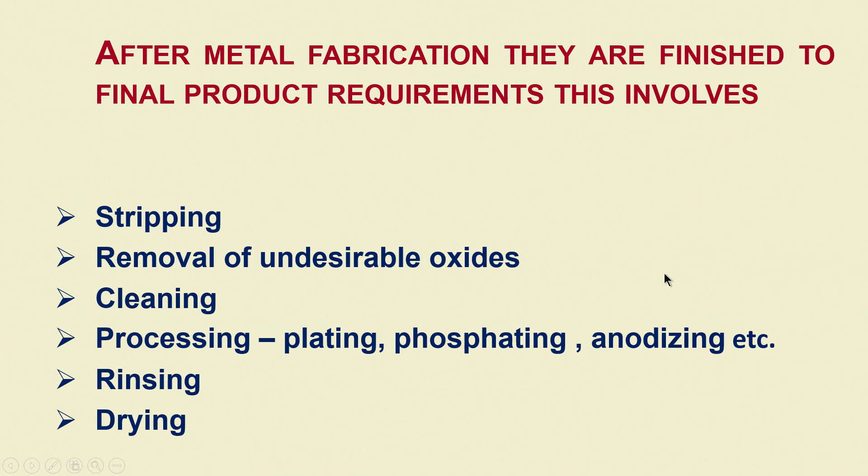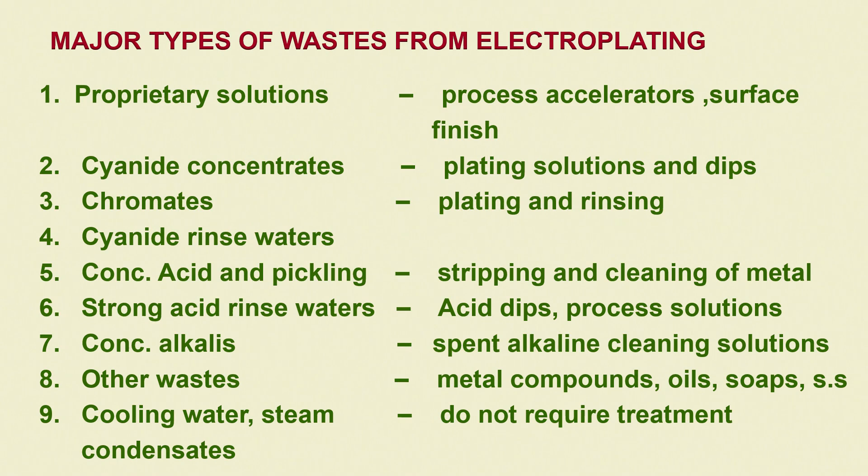These are the metal finishing industries and their final products, typical operations, and waste origination. This is regarding the major types of wastes in electroplating industries. Other industry wastes also will be almost similar.

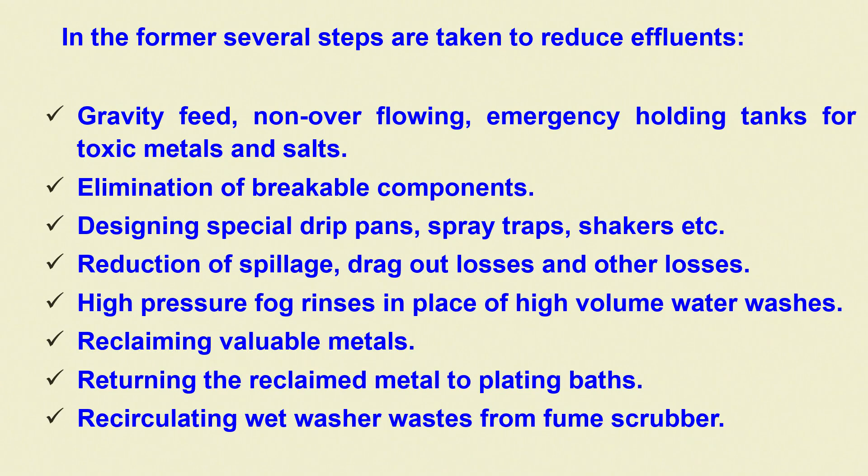Then these are the salts, cyanides, etc., followed by treatment corresponding to different types, and specific steps we had discussed earlier.

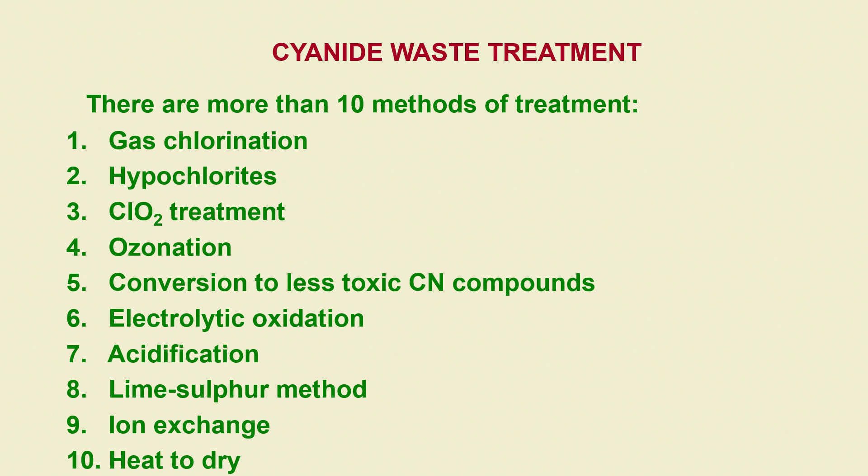Cyanide waste treatment has a number of possibilities. We need not be afraid of cyanide in the effluent, and chlorination etc., these I have discussed in detail.

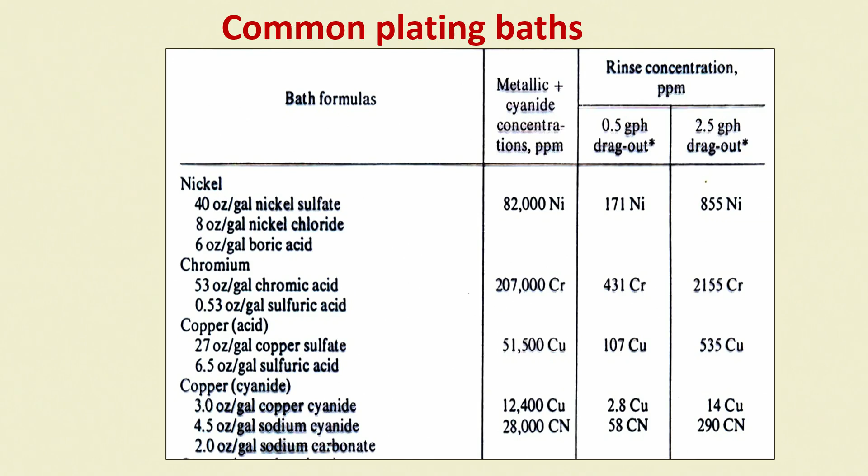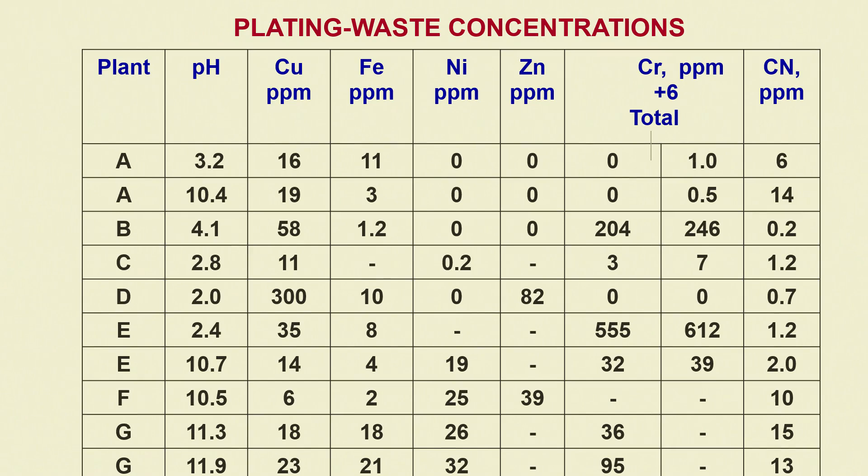And then sludge, electrochlorination etc., where there is no sludge. Then typical common plating baths and bath formulas we have discussed, followed by flow charts for some common plating baths, then plating waste from different kinds of industries.

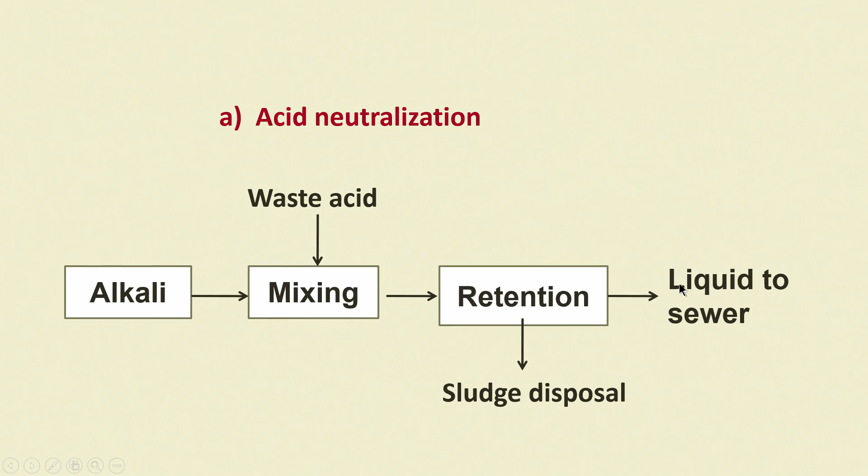Then basic treatment, all these we have discussed earlier. So I am just reminding you quickly what steps are involved before we proceed on to the ZLD, such as batch acid neutralization, all of which we have already covered.

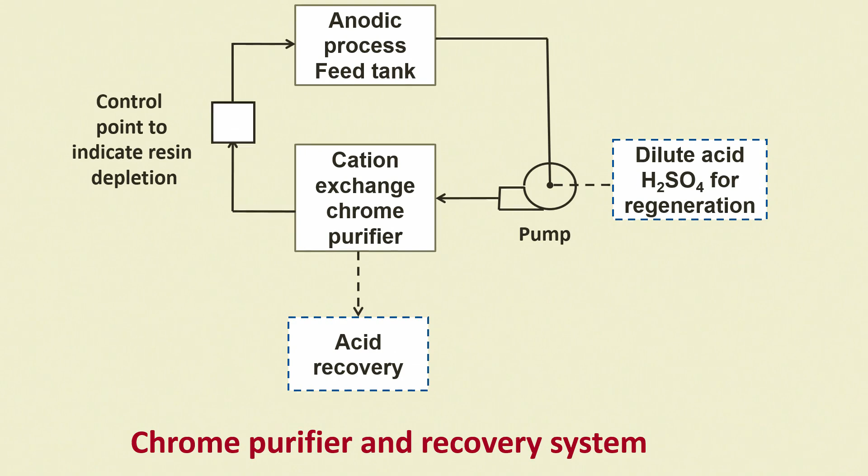Chrome recovery systems, vacuum evaporation, reduction, precipitation, followed by neutralization, and then I had discussed with you about the solubility products of the hydroxides of many of these metals -- copper, zinc, lead, silver, cadmium hydroxides.

Their solubilities are slightly minimum in alkaline conditions, but solubility will increase in acidic conditions below pH 8. If you look at the solubilities of sulfides, there is also a possibility that we can collect them at the order of about 10⁻⁴, that is ppb levels. Precipitation is possible.

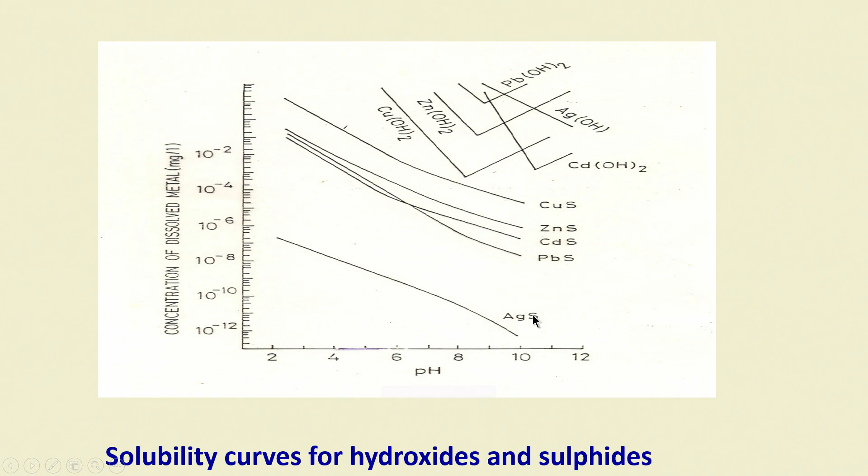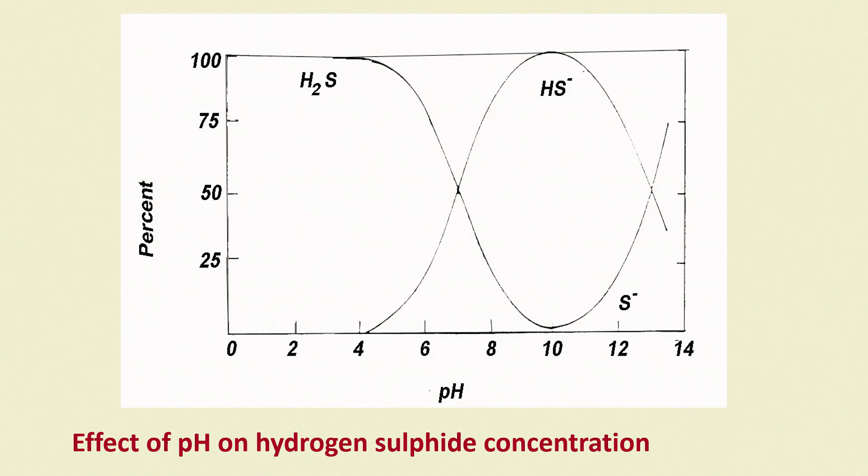So these are typical reactions I had shown, and two types of complexes with sulfide precipitation, their pH effect, and then a typical procedure for treatment, including various processes and wastes requirements -- this we have discussed.

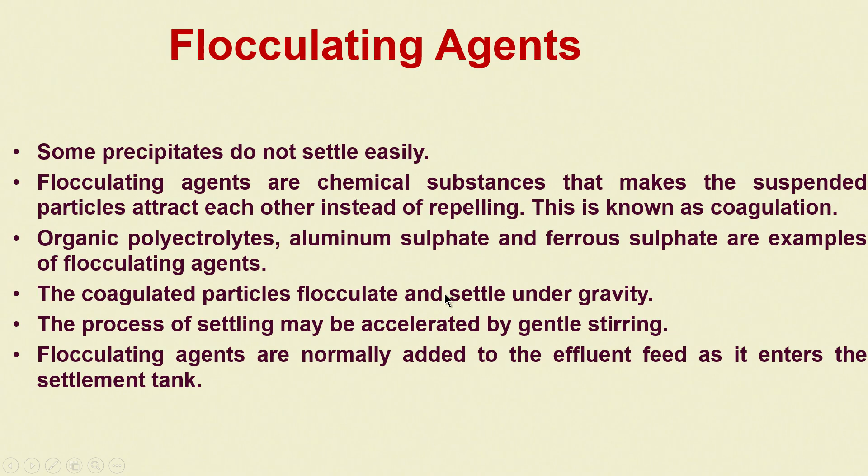Then some flocculating agents needed for collection and precipitation of some of the sludges, and sludge treatment I had discussed a little bit, sludge disposal followed by sludge containment, etc. That brings us to the last discussion part: zero liquid discharge.

What do we have here? I will give you a small outline of what is zero liquid discharge, and I would like to tell you at this point that zero liquid discharge is a very, very important concept in 21st century living.

The basic thinking is, if the effluents contain toxic substances, then they have to be separated. Then if I separate, would the water be reusable or not? If I am able to separate the pollutants, would the treated effluents be reusable or not? The answer is usually no.

It has to go through at least about 600 feet depth fall and about 20 kilometer flow before it collects enough oxygen from sun's rays and from the atmosphere, and enough radiation from sun's rays, to get natural purification, and that too subject to proper dilution.

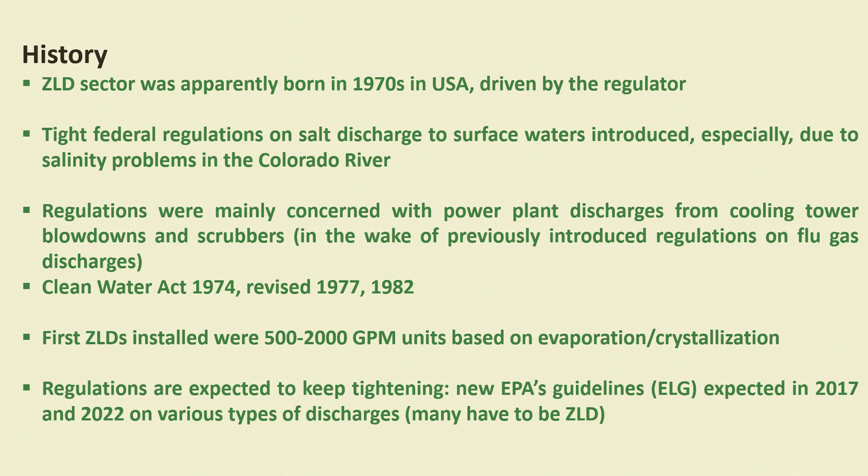So what are the current drivers? The major driver for using ZLD includes environmental regulations for discharge of specific solutes, salts, toxic elements, nitrates, nitrites, cyanide, chlorides, hydroxides, sulfides, etc.

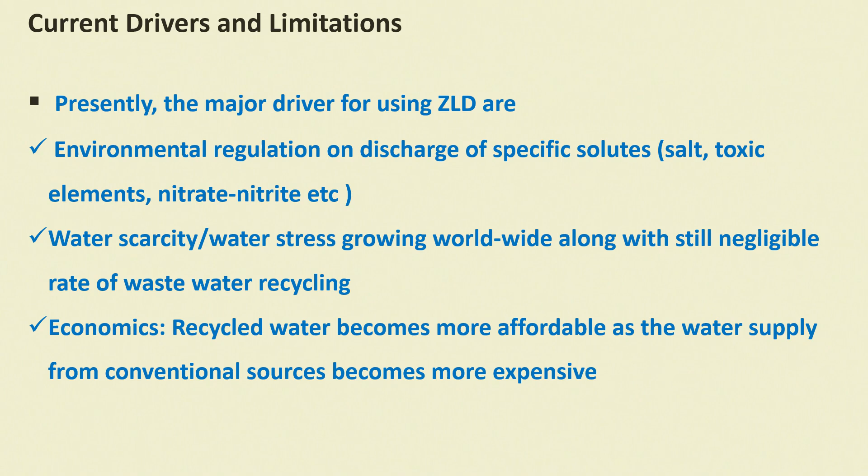Then water scarcity is another driving force, water stress in the growing world. And then economics: recycled water becomes more affordable as the water supply from conventional sources becomes more expensive. This is a very simple economic concept.

Growing responsibility and education towards awareness of environmental issues is also one of the driving forces, followed by ZLD cost, which is high in most cases, potentially becoming a more economic solution when waste needs to be transported in large volumes over long distances.

Here I want to add that if the quantities are really large, then you cannot transport so much liquid elsewhere. But if you go for ZLD, what remains after taking out the liquid is a very small quantity of waste, so that will become much cheaper in handling.

Still, in spite of all these advantages, ZLD has some drawbacks also. As of now, it is very highly costed, that is both capex and opex, capital expenditure and operating expenditure, is very high as of now.

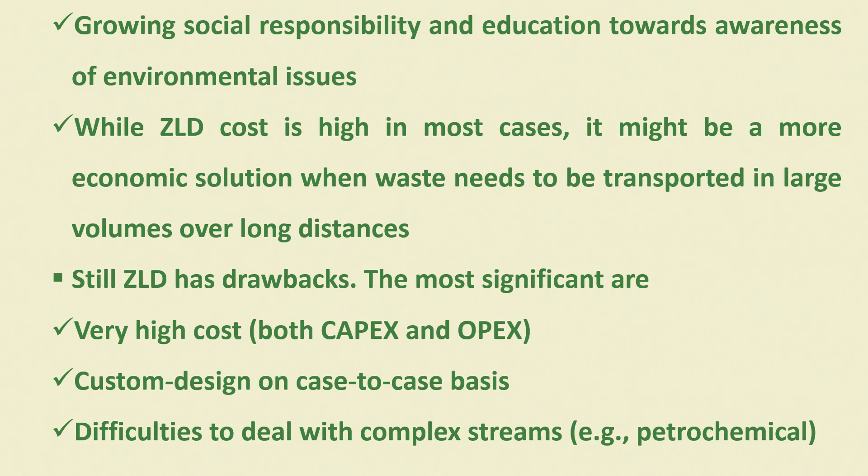A custom design has to be made on a case to case basis instead of a general design, and then there are difficulties to deal with complex streams. For example, petrochemical streams will have a lot of problems, especially since the wastes that are generated would not be common with many of the effluents produced in other industries. They are all special industries where they need special treatment only.

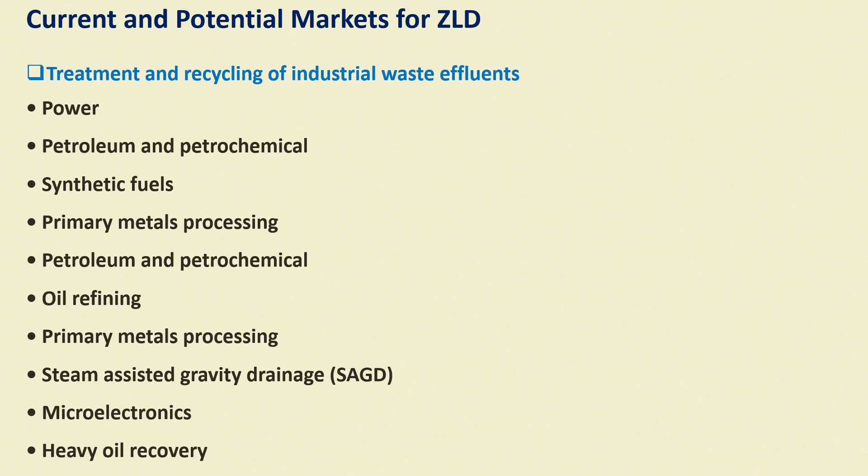Then heavy oil recovery is another aspect where current and potential markets for ZLD are expected to make rapid strides in progress.

So there are other industries, for example cogeneration, pulp and paper, coal mining, fertilizer, solid waste, battery manufacturing, PVC, coal, ethanol production — all these are very important industrial aspects, followed by tertiary treatment of municipal wastewater effluents and inland desalination.

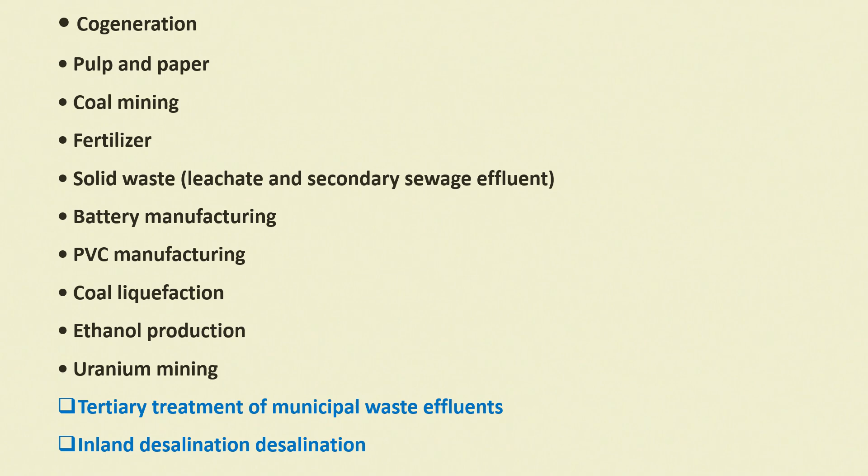So conventional thermal ZLD technology basically is based on evaporation and crystallization operations. Evaporation usually aims around 90% water recovery, whereas crystallization may achieve even 100% recovery.

We do not mean 100% when we say 100%, but at least 99.99% should be feasible. So solids can be further dewatered on a filter press for landfill.

There are a couple of mistakes here. Double typing has taken place. I request you to bear with me. I have tried to correct it as much as possible. But it does not make sense to have that kind of mistakes.

So latent heat of evaporation is partly recovered. Operational and capital costs are still very high as of now in ZLD.

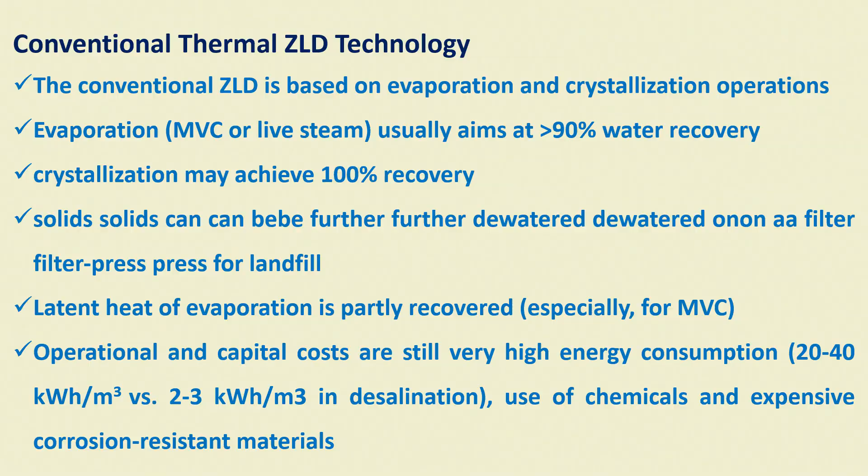For example, in ZLD, you can see that 20 to 40 kilowatt hour per cubic meter energy consumption is there, compared to 2 to 3 kilowatt hour per meter cube for desalination. So, use of chemicals and expensive corrosion-resistant materials is another aspect that is as of now a small hindrance to ZLD objective. See the complex

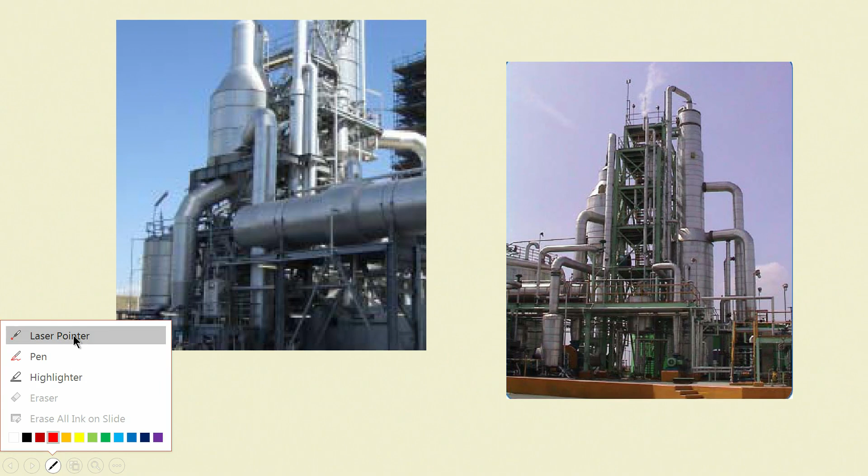ZLD operations, and these are all for petrochemical industries, only effluent treatment systems. So, it makes a lot of complicated engineering design, cost, treatment cost, etc., but you can see that the wastage or effluent in the gaseous form coming out is very less here.

Then there are other techniques, for example, this MVC evaporation technique. So here, suspended solids are removed prior, and the calcium hydroxide and magnesium hydroxide precipitations are commonly employed. And here I have a boiling point, a fraction evaporated, etc.

Some of these things, if you study well, you will be able to know. I know about it, and I am not going into detailed aspects because these are all very simple flow sheets. And anyway, whenever you want to design a ZLD, you will have to do it case by case only. So I am not going into detail. These are the common typically available systems.

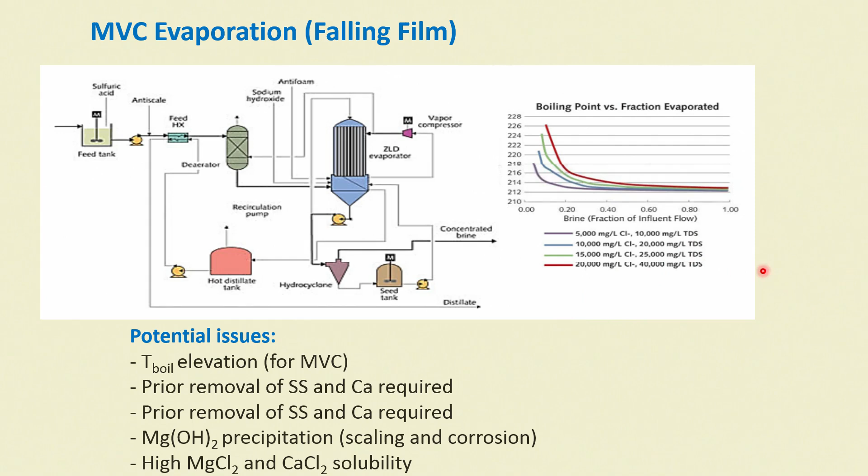So, for example, if you go for crystallization, it is not very tricky. For example, here I have brine and steam is there, condensate is there. We add a little bit of antifoam, sodium hydroxide neutralization, and take it to crystallization, and then after crystallization, filtration and collection and disposal. Similarly, vacuum crystallization is also another system.

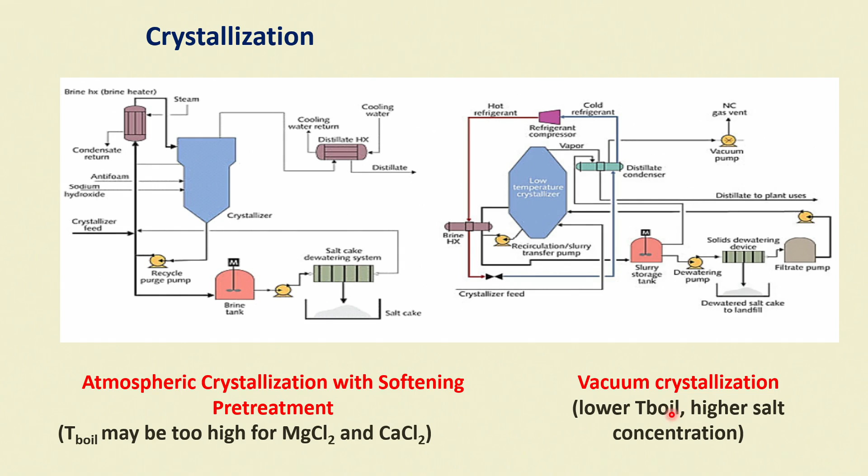Here the temperature for boiling will be reduced quite a lot, followed by higher salt concentration, which is a very typical advantage. Now, hybrid ZLD technologies are there, a little bit mixing of the technologies, but there is strong motivation to employ energy saving processes. For example, this multiple evaporator system, MVC crystallization, etc.

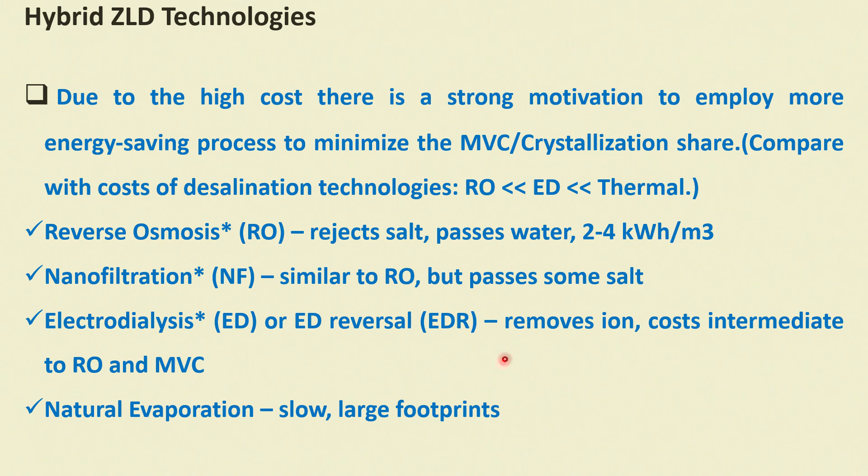Electrodialysis removes ions, costs are intermediate to RO and MVC. Natural evaporation, again, is slow and has large footprints, again not so favored. But any of these - reverse osmosis, nanofiltration, electrolysis, electrodialysis and electrodialysis reversal - all these things are quite often employed in modern day zero liquid discharge systems.

So, another possible motivation is the presence of organics, volatiles, etc., colloids, etc. Here what happens is many of the volatiles will not be economically recoverable if the concentration is very low. So we go for evaporation, and then if we cannot recover, if we cannot let them into the environment as vapors, we can go for bioremediation. Bioremediation and then this membrane units, ultrafiltration, pre-treatment, membrane biological systems.

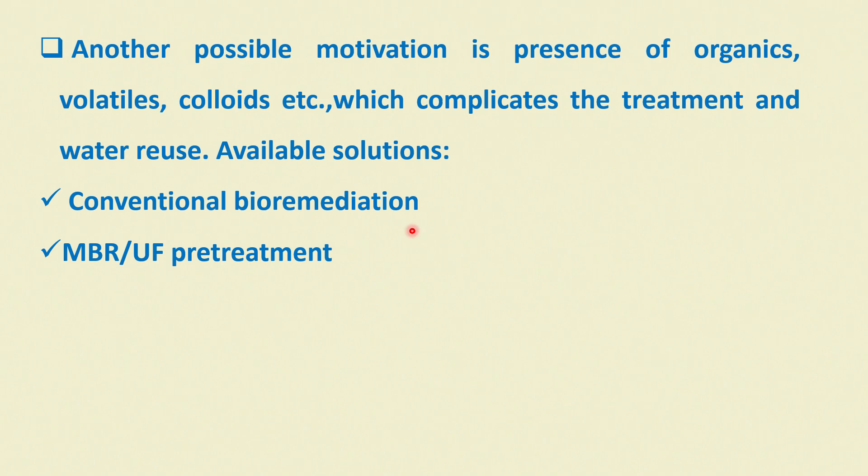These are all very typical technologies which are well established. Then ZLD combined with RO is again a very attractive system. RO is presently the best and most energy saving available technology for desalting. The purpose is then to use RO to recover as much water as possible before MVC.

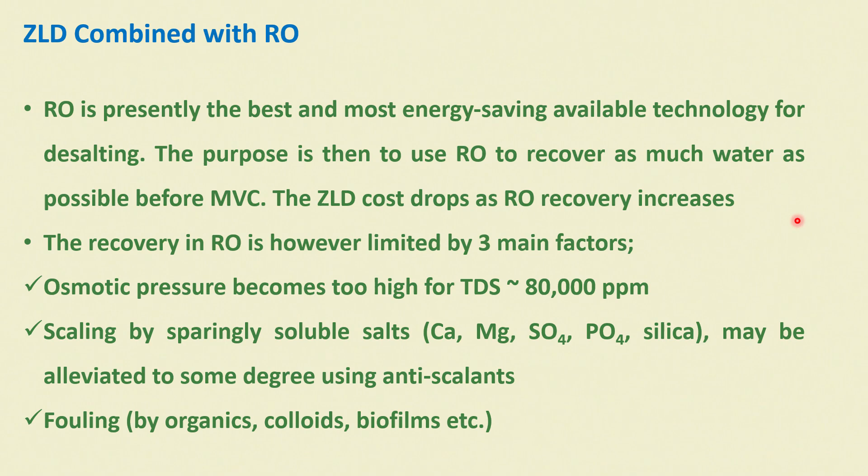If you wish to recover reverse osmosis water, average efficiency is approximately about 50%, but nowadays the recovery varies from 85 to 95%, and the TDS, total dissolved solids, osmotic pressure becomes too high for more than around 80,000 ppm or something. So, scaling may be alleviated to some degree by anti-scalants. And then fouling, of course, is always there. So, if there are organic substances, colloids, biofilms, etc., you cannot employ RO systems.

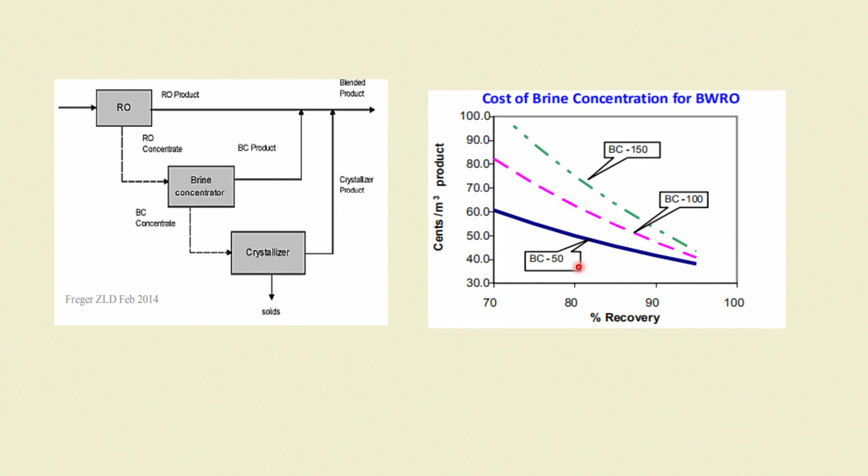So, RO limitations are there, as I had already told you, that if you want to recover more, then the cost will increase exponentially here. You can see this now, and same thing is true with brine also. Suppose you have a salt effluent, and then you want to recover better 90% or something, you can see that brine concentration also will increase in the reject, and the cost also will become very high.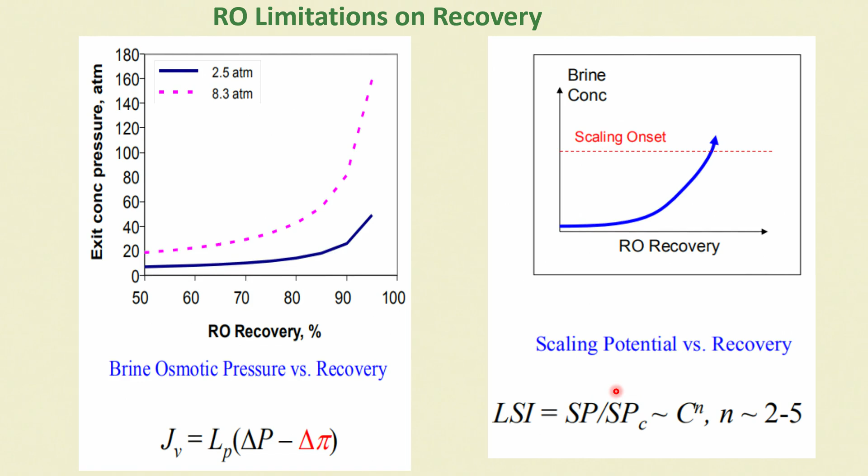Then increasing RO recovery, we can go for two stage RO and nanofiltration. Here, interstage softening or precipitation also is quite common, and we advise people to go for this interstage softening and precipitation. Of course, it requires more chemicals to be used, but the quality of water improves.

Here I have given you a simple system, that is 3000 milligram per liter. Primary separation will give you 85% straight away, and remaining reject will be around 19,440, and again if you can take it to a crystallization, what comes out would be the mother liquor from this would be having about 18,100, followed by another RO system where recovery would be 67% and the reject would be 54,000 milligram per liter.

This can be evaporated and take out the salts, and you can either bury the salts and do whatever is necessary to store or dispose of in a standard TSDF, that is treatment, storage and disposal facility.

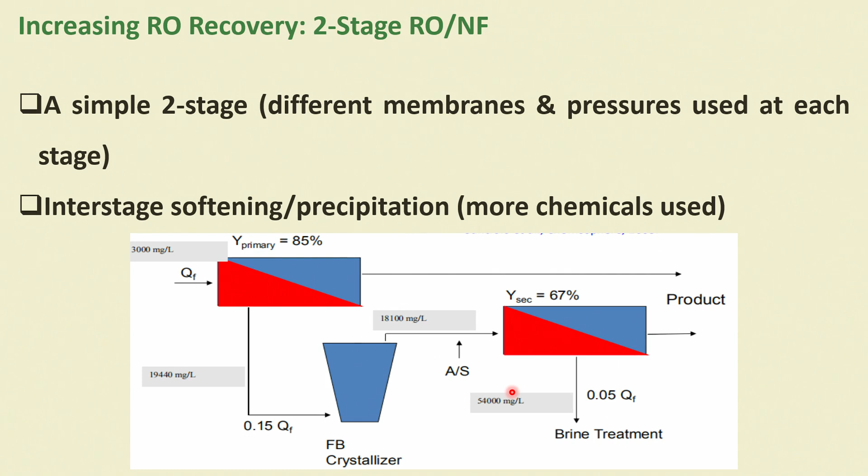Then we have RO, if high efficiency RO processes are there, they can remove the calcium and carbonate hardness. RO can run around pH 10.5 also, and high pH creates a cleaning environment, that is low fouling. And then silica solubility is very high, and then hardness can be removed. Salt rejection and flux are increasing, and recovery will be more than 90%.

However, cost will be proportionately higher, obviously approximately by about $0.13 per cubic meter.

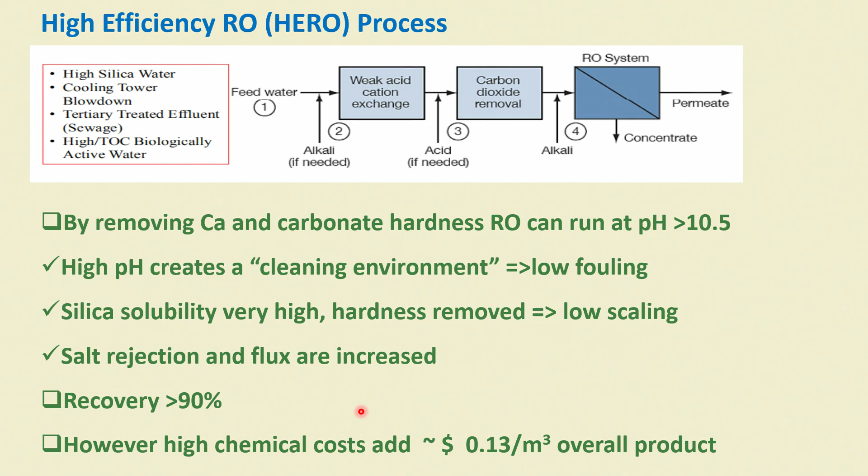And ZLD combined with ED, electrodialysis. Here the advantage is it need not be connected automatically, it is a choice. So ED is not limited by osmotic pressure, therefore it can achieve much better recovery.

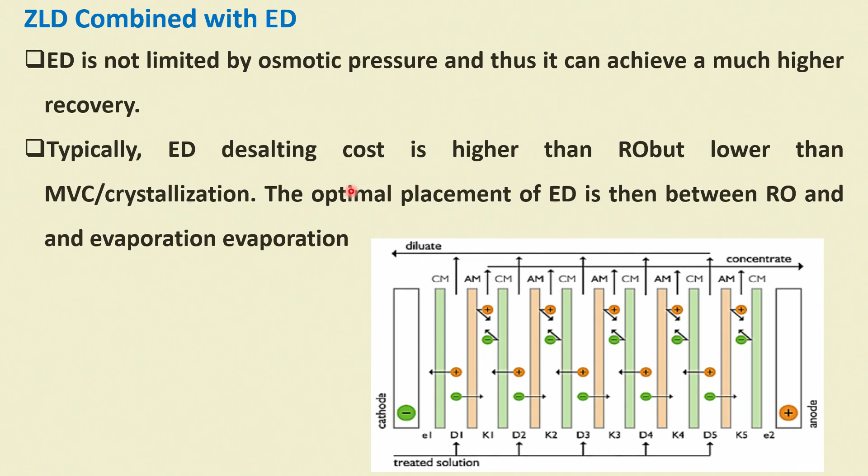That means it can be used to remove the ions, dissolved salts. So typically ED desalting cost is higher than RO, but lower than crystallization. So that is one of the advantages, and then the question arises, why not increase the ED itself.

Electrodialysis, instead of RO. The point is, in RO, if the quantity is very large, electrodialysis becomes very costly. So first we go for RO, then followed by ED, so that we handle smaller quantities, but higher concentration of the dissolved salts.

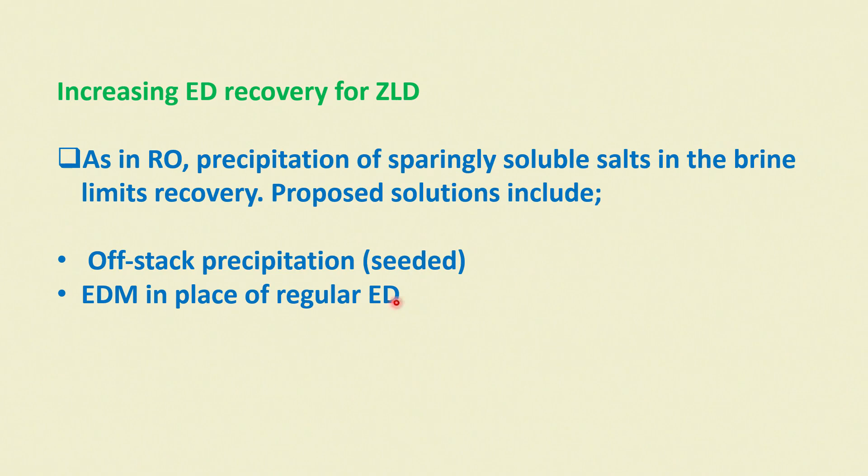So we can go for off stack precipitation or EDM in place of regular ED. And then these are the typical systems, RO followed by EDM followed by crystallizer.

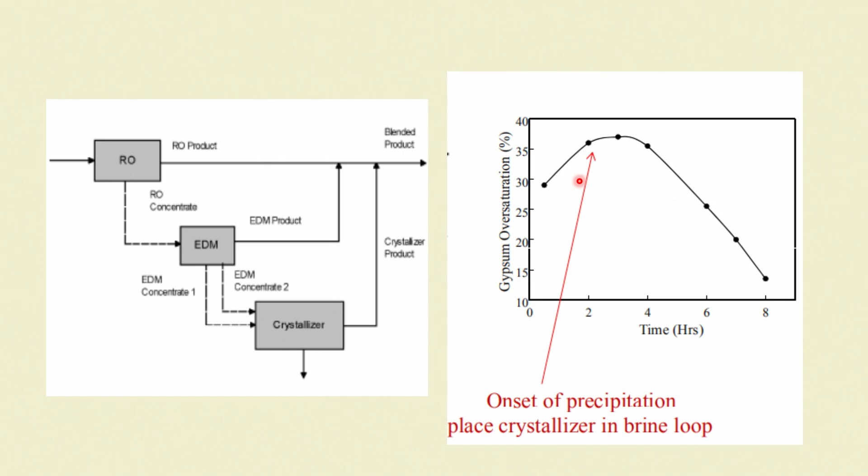And onset of precipitation, this is a typical study people have done for gypsum oversaturation. This is for a fertilizer industry. You can see that onset of precipitation happens even within 2 hours of putting it in the crystallizer. That is interesting, because the salt concentration should be very high whenever you want to remove it by crystallization. It has to reach the super saturation level before it can start precipitation.

So the ED metathesis, for example, formation of sparingly soluble salts can be prevented very easily using 4 compartment units. Here you can see in the next slide. First one is RO concentrate. Here I have calcium, magnesium, sodium, chloride, sulphate, etc.

These are the concentrations. If I go to EDM, take the reject of this, I end up with about these numbers, that is 322, magnesium will become 417 ppm, sodium will become 4200, chloride, etc. They all become lower than RO. That means water will be more purer in EDM, and that is the EDM feed.

And what happens to EDM concentrate? So after EDM I get 34 ppm of calcium from 322. That is fantastic, isn't it? And then salt concentration will increase quite a lot, chloride, etc. These are the rejects now. So here you can see that EDM is much more efficient than RO alone.

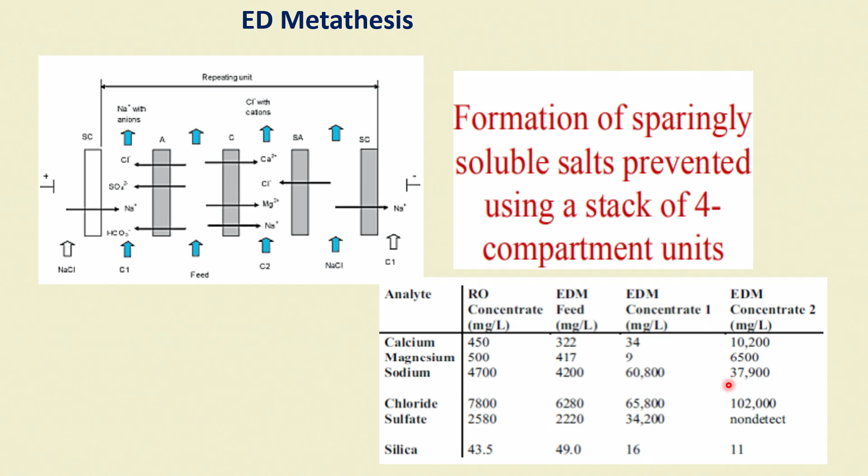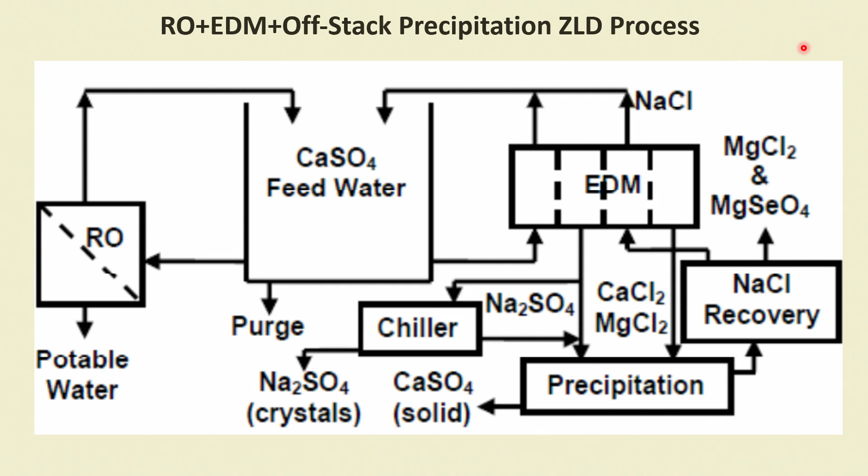Then there are biological systems, a couple of them, and these remove TOC, total organics, as CO2 and sludge. They may leave some recalcitrant organics, but not much, and there are methods to remove such organics. MBR-UF is significantly more expensive, because MBR itself is very costly.

Membrane bioreactor is expensive but offers a smaller footprint, since MBR can be very less space consuming. So that is one advantage we have here.

So MBR followed by 2-stage RO, evaporator, and treated water, we get clear water that can be taken to different systems. Here it is a tannery waste system.

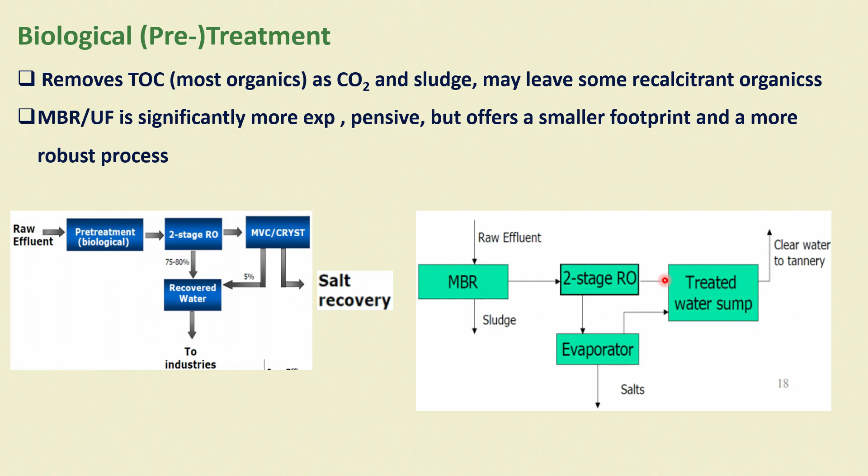Then emerging and state of the art ZLD solutions I want to discuss. Not much to add in this. Here are several alternative technologies: SPARRO, ARROW, and pH elevation precipitation followed by RO, and then VSEP.

These are RO systems. In such systems, RO membranes are kept shaking continuously so that there is no build-up of fouling. This is a very fantastic technology which I had the opportunity to review recently. Very nice, 85 to 95% recovery straight away only from RO systems.

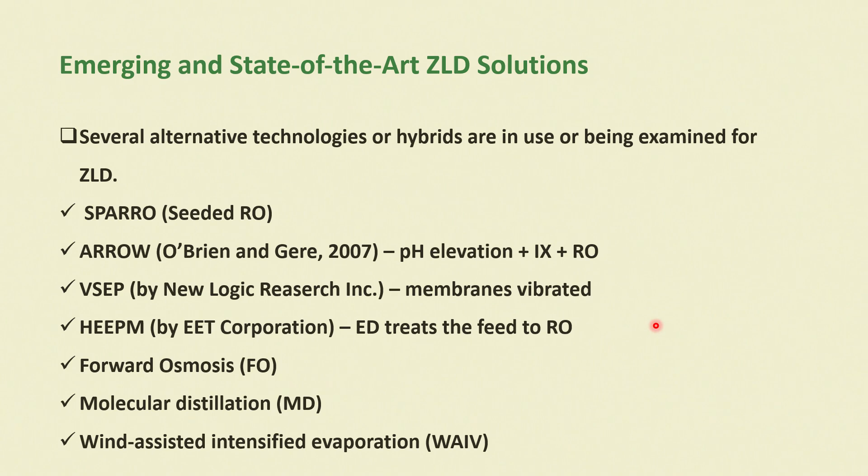And then we have HEEPM, that is ED treats the feed to RO. Then forward osmosis, again instead of reverse or normal osmosis, can also be employed, followed by molecular distillation and wind-assisted intensified evaporation, called WAIV. These are alternate technologies we normally explore depending upon the volume and cost.

For example, in the SPARRO process we have hard water from mining industry. All you got to do is feed it, and then calcium sulphate precipitates and seed crystals form, not on the membrane surface but outside, and the permeate you get is very simple reusable water.

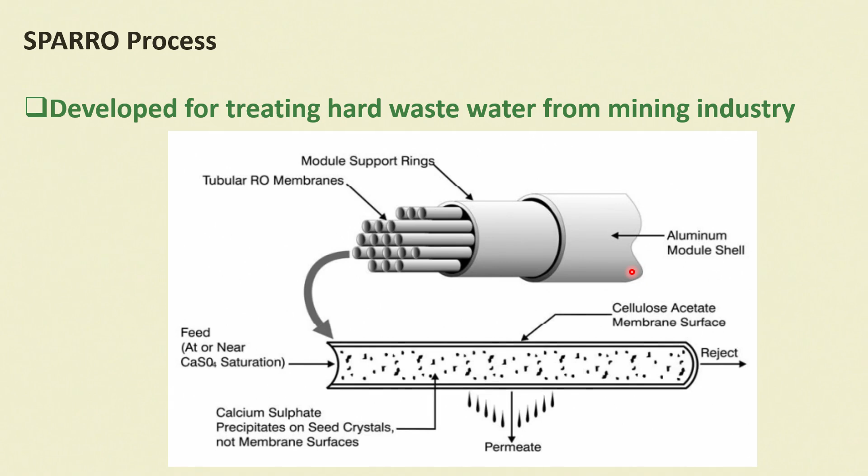Here are other systems I have described, just by notation regarding the actual system. And then forward osmosis, very useful today in the oil industry, was proposed as an alternative to RO. It is viable only when waste energy is available.

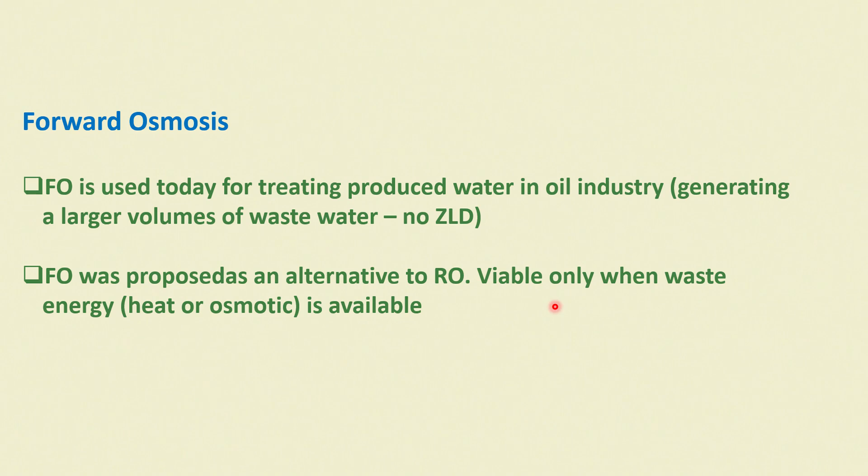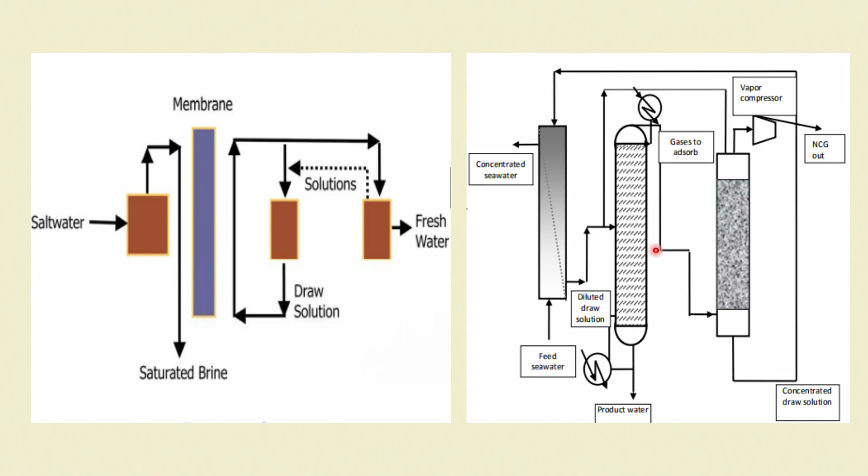This is a forward osmosis figure. I will not go into details, except you can study this yourself and come to some understanding of the process, because I have put most of the titles and components here, and you can imagine what each component would do.

Enhanced natural evaporation is another process used earlier, about 20-30 years before. People used to have evaporation ponds, widely used as part of ZLD, but their footprint can be excessively large, since most of the time large ponds are maintained where water evaporates naturally, leaving the concentrate. The concentrate will have different layers in the pond, where anaerobic and aerobic processes are in equilibrium with each other. So normally for very complex waste, such ponds become very useful.

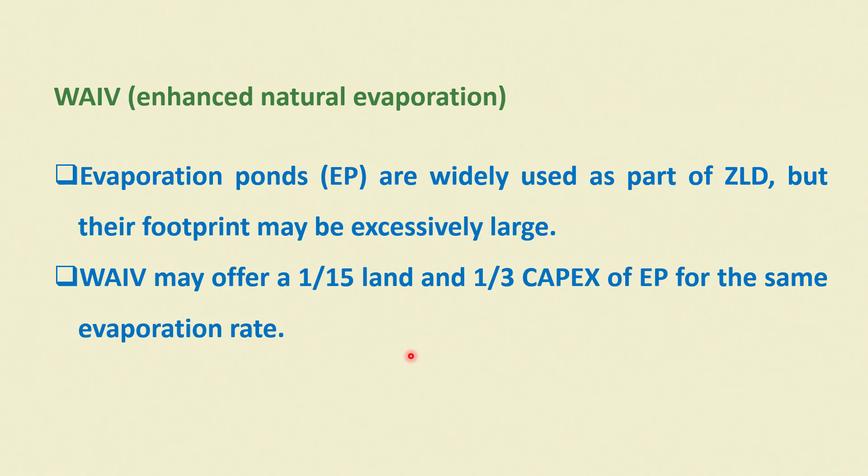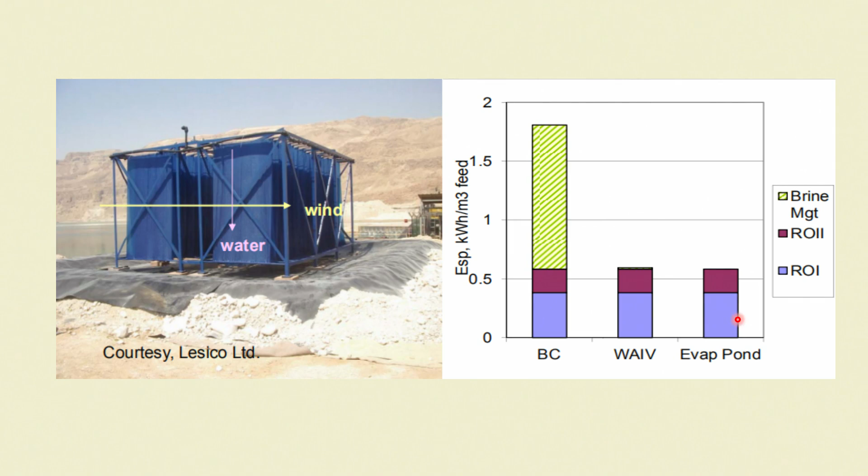So the industry outlook is something like this: efforts continue to find alternatives to energy intensive evaporator crystallizer systems, hybrid systems with increased recovery being the dominant approach. Progress is being made in lowering the cost, and industry analysts predict a cumulative annual growth rate of more than 200% in the next decade. I think it will be well for us to know more about these things as and when the opportunities arise.

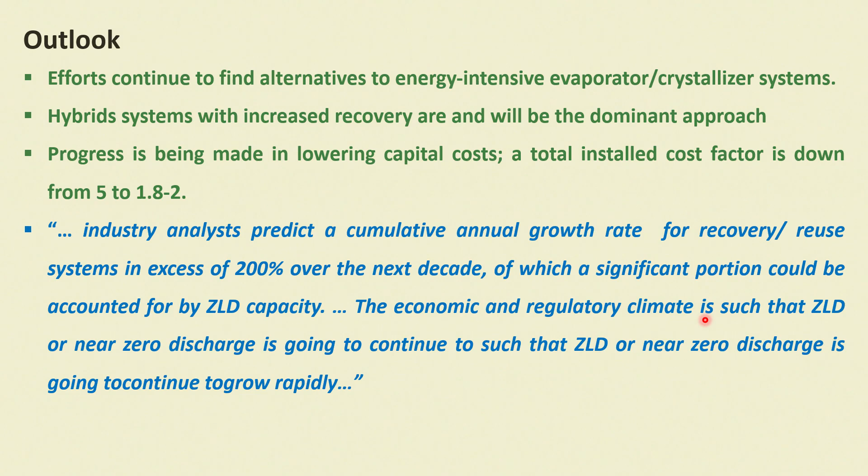I would like to conclude my discussion about the RO and ZLD systems, and I would like to say thank you for being with me in all these 41 lectures, and I hope you had a good opportunity to learn many things which I myself did not have the opportunity to learn when I was a student.